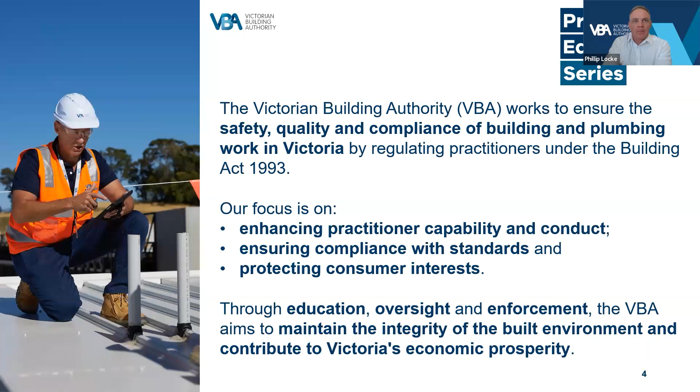As Victoria's building and plumbing regulator, the VBA is committed to ensuring a confident and thriving industry and collaborates with stakeholders to enhance practitioner capabilities and deliver improved outcomes for the community.

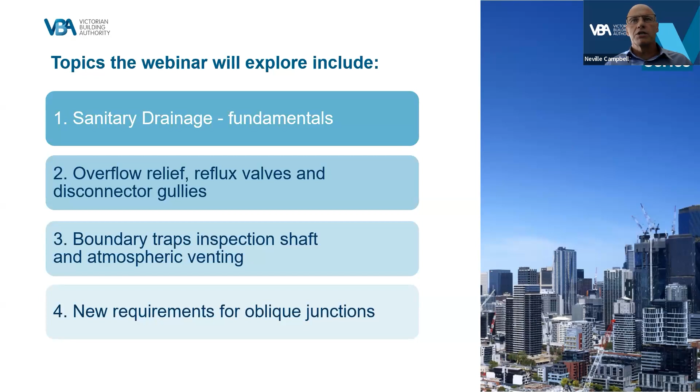The webinar will explore sanitary drainage fundamentals such as overflow relief, reflux valves, and disconnector gullies, boundary traps, inspection shafts, and atmospheric venting, and the new requirements for oblique junctions in below-ground drains. The learning goal for this webinar is to reinforce the fundamentals of drainage design for various classes of buildings.

Sanitary drainage fundamentals. So what is drainage work? Drainage work is the construction, installation, replacement, repair, alteration, maintenance, relining, testing or commissioning of any part of a below-ground sanitary drainage system.

This extends from the above-ground sewage or waste pipes up to the approved point of connection. This could be a network utility operator sewer, a land application system, or a holding tank. It also encompasses below-ground stormwater drainage, but we will not cover that in this webinar.

What is not drainage work? The opening and closing of inspection openings, caps, and covers in sewage and waste pipes, the clearing of blockages, or closed-circuit television inspection of sewage waste pipes using existing openings and removable grates, and design work carried out by a building practitioner, an architect, a draftsperson, an engineer, a landscape architect, or a designer.

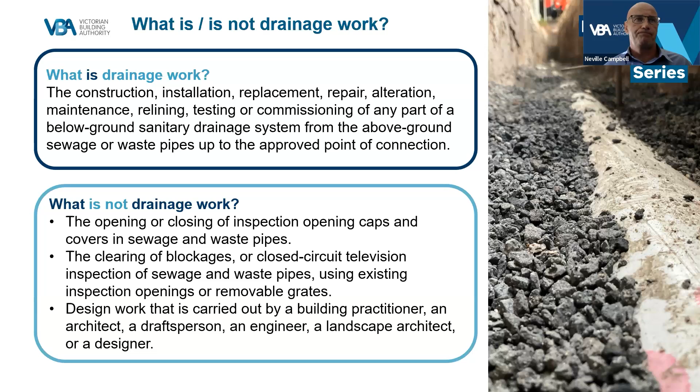A sanitary drainage system must ensure that sewage is transferred from a sanitary plumbing system to a disposal system, which is approved by the authority having jurisdiction. These will typically include a network utility operator sewer, a land application system, or a holding tank.

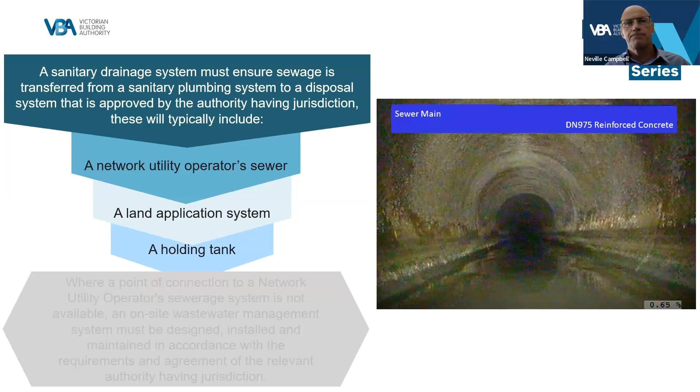Where a point of connection to a network utility operator's sewage system is not available, an on-site wastewater management system must be designed, installed, and maintained in accordance with the requirements and agreement of the relevant authority having jurisdiction.

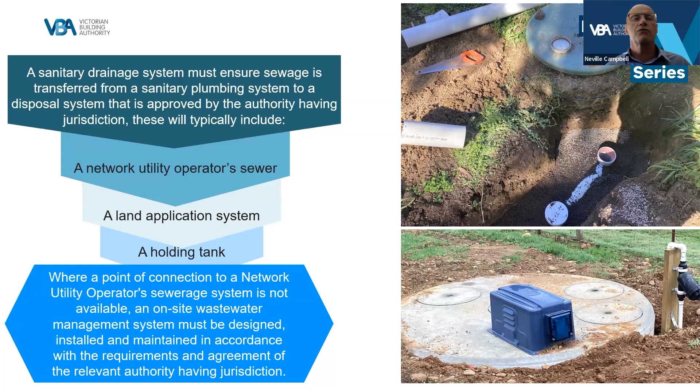Now we'll look at some of the fundamental components of a sanitary drainage system in some common scenarios. The first one is a typical Class 1 dwelling, your average home, or it might be a townhouse with its own sewer connection point. In this scenario, each drain must have a vent located at both ends of the drain if the drain incorporates a boundary trap.

At the upstream end of the drain, if the drain is in a boundary trap omitted area, and at the upstream end of any branch drain that exceeds 10 metres from the vented drain to the weir of the trap, you must have an overflow relief gully. A reflux valve may be used in lieu of an overflow relief gully where the site's entirely built on, and where there are no acceptable alternatives, or the ORG may be omitted where the lowest fixture connected to the drain is at least 3 metres above the ground at the point of connection.

Our second example is a site with 2 Class 1 residential buildings. In this scenario, the drain must have a vent located at the upstream end of each building, at the downstream end of the drain if the drain incorporates a boundary trap, at the upstream end of any branch drain that exceeds 10 metres from the vented drain to the weir of the trap, and at least 1 overflow relief gully.

A reflux valve may be used in lieu of an ORG where the site is entirely built on and there are no acceptable alternative locations, or the ORG may be omitted where the lowest fixture connected to the drain is at least 3 metres above the ground at the point of connection.

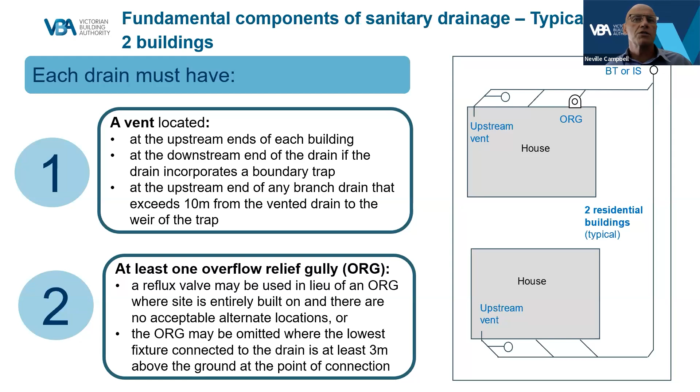Our third example is a site with 3 or more residential buildings, such as 3 villa units. While our example has 3 buildings, it could easily be more than 3. And if the 3 Class 1 dwellings were under the same roof line, they would still be considered 3 individual buildings.

In this scenario, each drain must have a vent located at the upstream ends of each building, at the downstream end of the drain if the drain incorporates a boundary trap, and at the upstream end of any branch drain that exceeds 10 metres from the vented drain to the weir of the trap.

You must have at least 1 overflow relief gully at each building. A reflux valve may be used in lieu of an ORG where the site's entirely built on and there are no acceptable alternative locations, or the ORG may be omitted where the lowest fixture connected to the drain is at least 3 metres above the ground at the point of connection, and an inspection shaft at or near surface level at each building.

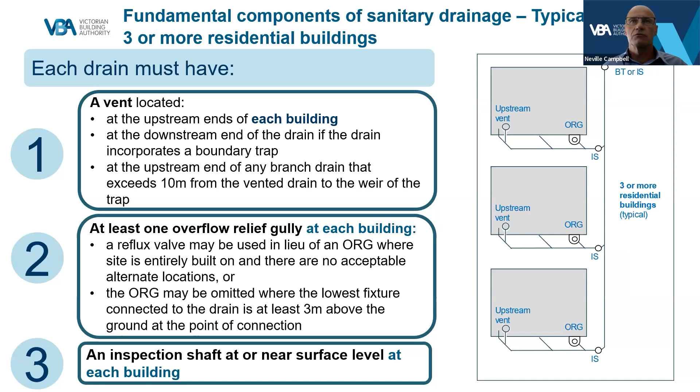This example is a typical arrangement of Class 8 commercial industrial buildings, such as factory units. In this scenario, each drain must have a vent located at the upstream end of the drain, at the downstream end of the drain if the drain incorporates a boundary trap, at the upstream end of any branch drain that exceeds 10 metres from the vented drain to the weir of the trap, and at least one overflow relief gully.

A reflux valve may be used in lieu of an ORG where the site's entirely built on and there are no acceptable alternative locations. Or the ORG may be omitted where the lowest fixture connected to the drain is at least 3 metres above the ground at the point of connection.

An inspection opening is required at each building. Although it is not mandatory, it is recommended that the IO is raised to ground. Note that in this scenario, the drain doesn't require a vent at each factory unit, provided there are not more than 2 water closet pans connected and that the branches do not exceed 10 metres in length.

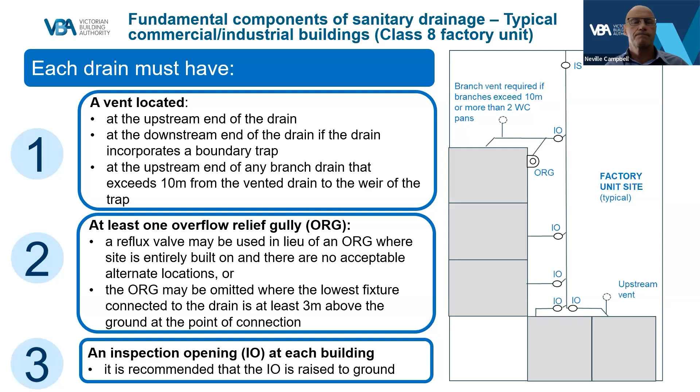The last example is a Class 2 building. This is a typical apartment building with one sole occupancy unit located above another. In this scenario, each drain must have provision for ventilation at the upstream ends of each building, at the downstream end of the drain if it incorporates a boundary trap, at the upstream end of any branch drain that exceeds 10 metres from the vented drain to the weir of the trap, and at least one overflow relief gully.

The reflux valve may be used in lieu of an ORG where the site's entirely built on, and there are no acceptable alternative locations. Or the ORG may be omitted where the lowest fixture connected to the drain is at least 3 metres above the ground at the point of connection.

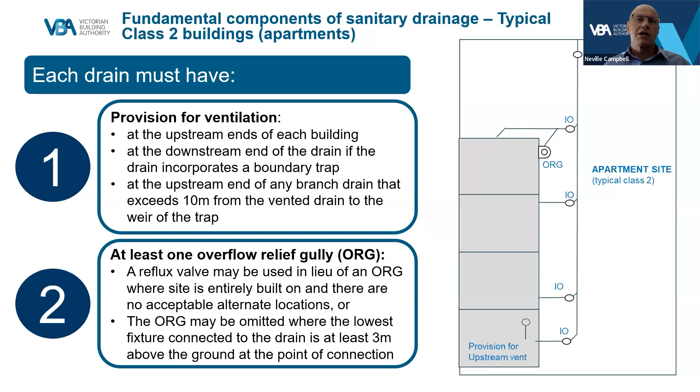In this type of building, if the ground floor is a car park and the lowest fixtures were on the first floor, the ORG could be omitted.

Quiz time. How many overflow relief gullies are required in a multi-unit development of 3 or more residential buildings? Is it 1 per building, 1 for the whole site, or none?

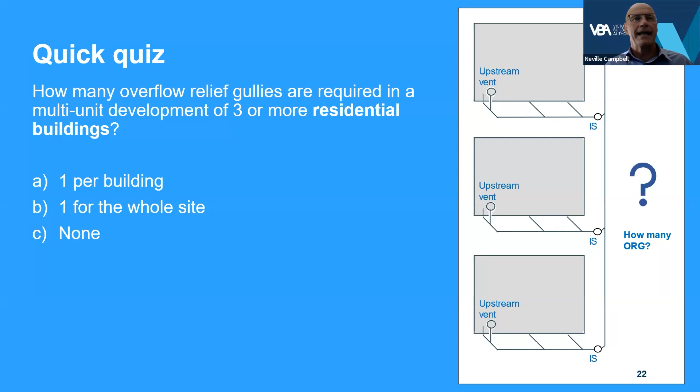The correct answer is A, 1 per building. Remember, this could be 3 Class 1 dwellings under the same roof line.

Now we'll look at drain locations and typical sizing parameters. This is typical of some of the common questions we get here in Tech and Reg.

So, location of drains. If a drain is located under or inside a building, it should only serve fixtures within that building. Where this is not practicable, the Plumbing Regulations of 2018 make provision for a drain that serves other buildings to be laid under another building, provided the following conditions are met.

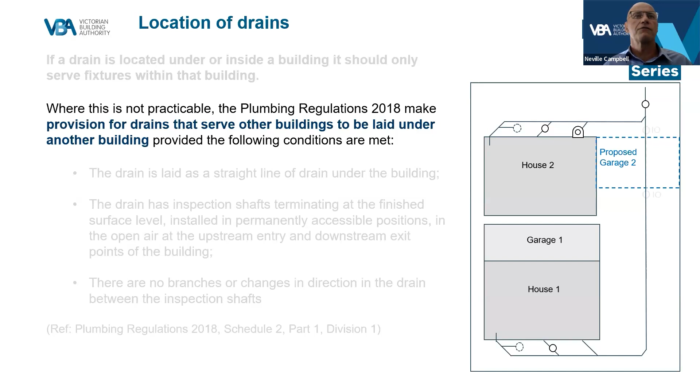The drain is laid as a straight line under the building. The drain has inspection shafts terminating at finished surface level, installed in permanently accessible positions in the open air at the upstream entry and downstream exit points of the building. And there are no branches or changes of direction in the drain between the inspection shafts.

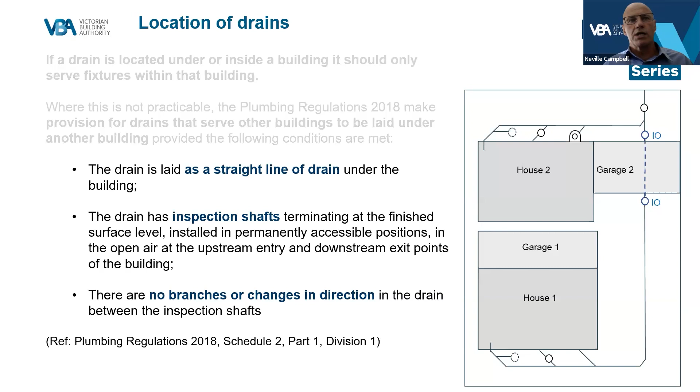Quiz time. In the figure below, does the drain under Garage 2 comply with the Plumbing Regulations of 2018? Is it yes, no, or not sure?

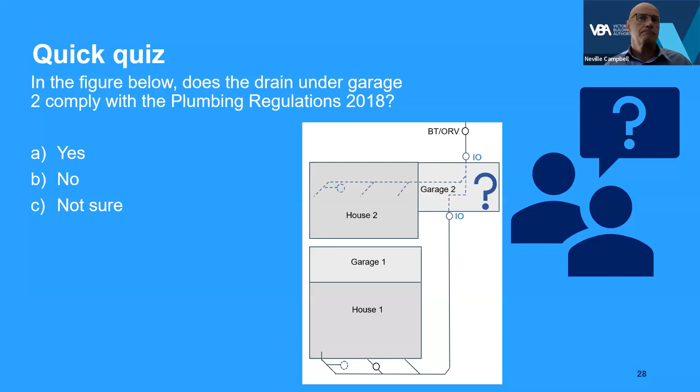The correct answer is no, because connections and offsets are not permitted under the building.

Sizing of drains. The minimum size of a main drain must not be less than DN 100. The minimum size of a branch drain must not be less than DN 65. DN 100 drains laid at 1 in 60 should not exceed 165 fixture units. Drains should be sized by the number of fixture units and the type of fixtures discharging into it.

Drains should not be upsized for the purpose of reducing grade. Discharge pipes of DN 50 or smaller must not be installed below ground unless they are connected to a floor waste gully or a vertical riser from a graded drain. This is a Victorian requirement under the Plumbing Code of Australia.

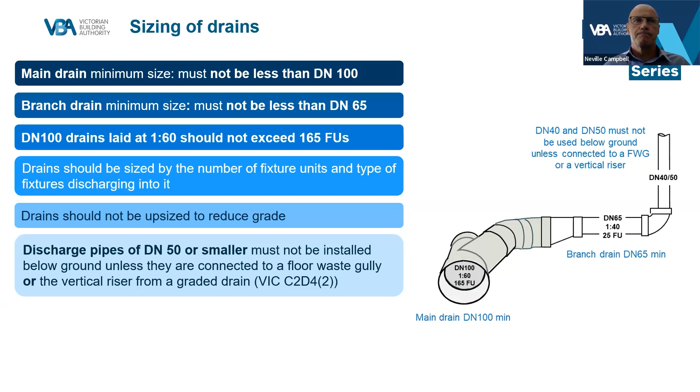Sanitary drainage systems must avoid damage from superimposed loads, such as loads from buildings and vehicular traffic. To achieve this, the standard requires drains to be laid with the appropriate depth of cover.

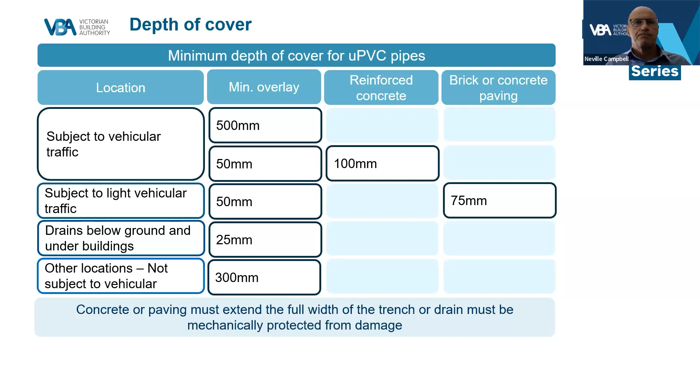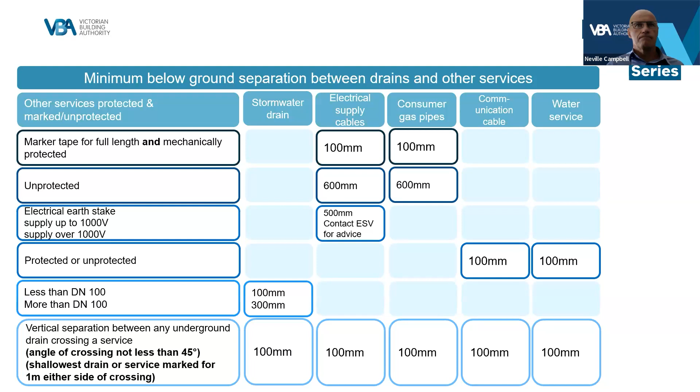Reuse of drains where buildings are demolished or removed. Where a building is demolished and replaced, existing drains must also be replaced to the point of connection. However, drains may be reused if

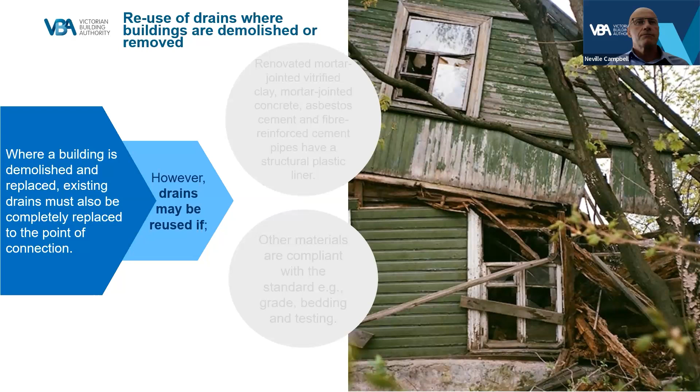mortar-jointed vitrified clay, mortar-jointed concrete, asbestos cement and fibre-reinforced cement have been renovated using structural plastic liners, or drains constructed of other materials have demonstrated compliance with the relevant sections of the standard, for example, grade, bedding and testing. Further guidance can be obtained from Practice Note DR03, Property Sewer Drains.

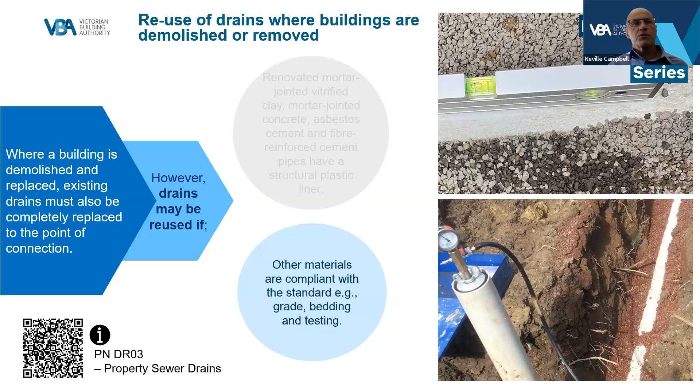Building over drains. When making alterations or additions to buildings, the footing system should not be placed over or adjacent to existing drains unless appropriate clearances have been achieved. Clearances include the angle of intersection with the footing, the annular space for wall and footing penetrations, installation of flexible joints if required, and the angle of repose from existing footings.

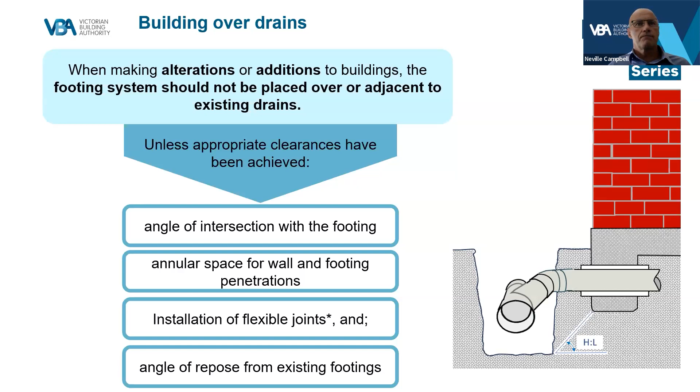Inspection shafts and boundary traps should not be built over. Where this cannot be avoided, the inspection shaft and boundary trap may be located under a roofed area or in a recess, subject to the relevant requirements of the standard.

Now we'll look at inspection shafts and boundary traps in a little bit more detail. Inspection shafts and boundary traps, general requirements. Each main drain must be provided with a boundary trap in a boundary trap area or an inspection shaft in a boundary trap omitted area.

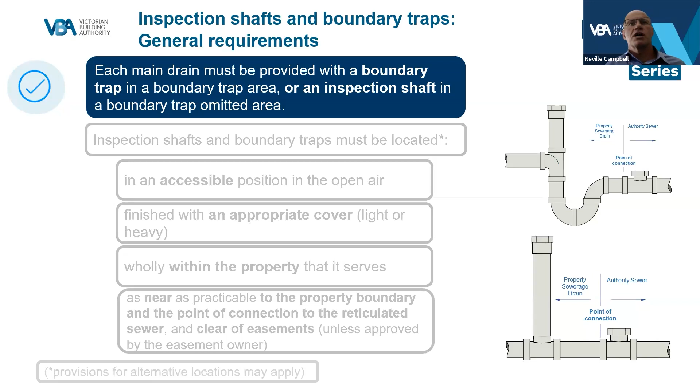Inspection shafts and boundary traps must be located in an accessible position in the open air, finished with an appropriate cover, that would be a light or heavy cover depending on the situation, wholly within the property that it serves, and as near as practicable to the property boundary and the point of connection to the reticulated sewer, and clear of easements unless approved by the owner of the easement.

Provisions for alternative locations may also apply. Where the inspection shaft or boundary trap cannot be sited in an accessible position in the open air, an alternative position may be used as follows.

The riser may be installed under cover, such as under a roofed area, provided the cap is finished at surface level and is readily accessible with not less than 1 metre clear space above the cap, and the cap is airtight.

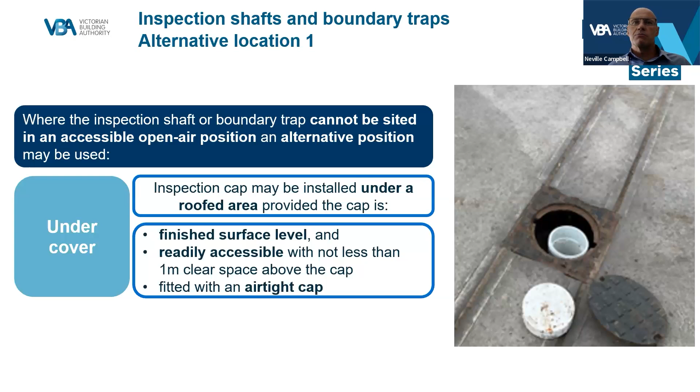Alternative location 2. The inspection cap may be recessed into an external wall of a building if the building is constructed up to the boundary and it is impracticable to site the inspection cap in the open air or under cover. The inspection cap is airtight with 100 millimetres clear space around the cap. There must also be 1 metre of clear space above the cap, and the recess must have a removable panel.

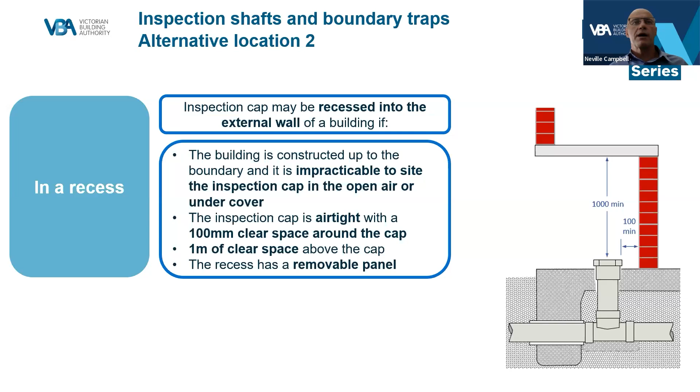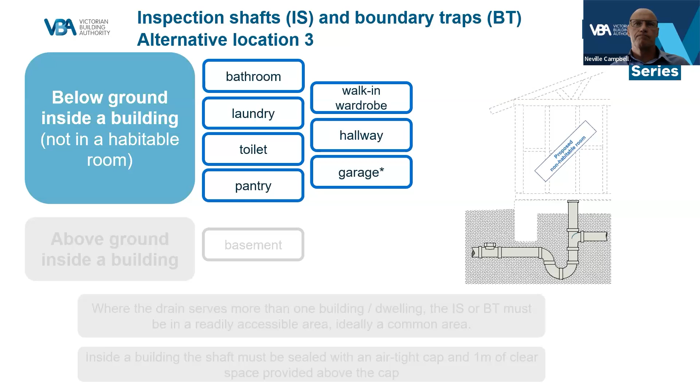A boundary trap could also be installed above ground inside a building, for example, in a basement. Where the drain serves more than one building or dwelling, the IS or BT must be in a readily accessible area. Ideally, this would be a common area. The location chosen should not prevent access to the BT or IS, even if the neighbours were on an extended holiday or the house had been sold to someone else.

When installed inside a building, the shaft must be sealed with an airtight cap and 1 metre of clear space provided above the cap.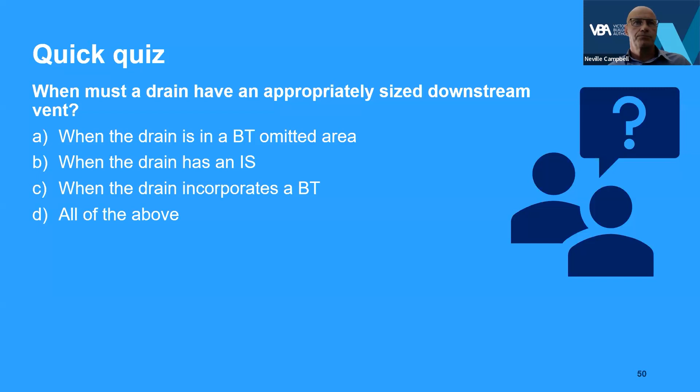Correct answer is when the drain incorporates a BT.

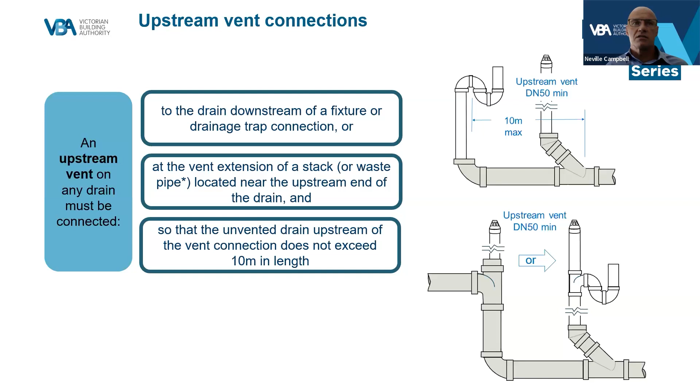Upstream vent connections. An upstream vent on any drain must be connected to the drain downstream of a fixture or drainage trap connection, or at the vent extension of a stack or waste pipe located near the upstream end of the drain, so that the unvented drain upstream of the vent connection does not exceed 10 metres in length.

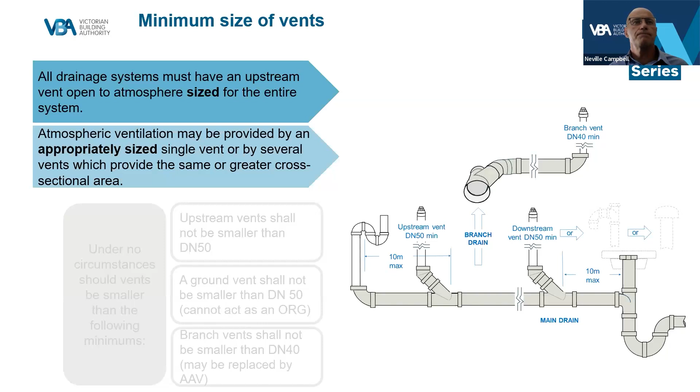Under no circumstances should vents be smaller than the following minimums. Upstream vents should not be smaller than DN50. A ground vent shall not be smaller than DN50, but be aware that 50mm ground vents cannot act as an ORG. Branch vents should not be smaller than DN40, but they may be replaced by an AAV.

In this figure, there are no fixtures depicted. We're only showing ventilation requirements here.

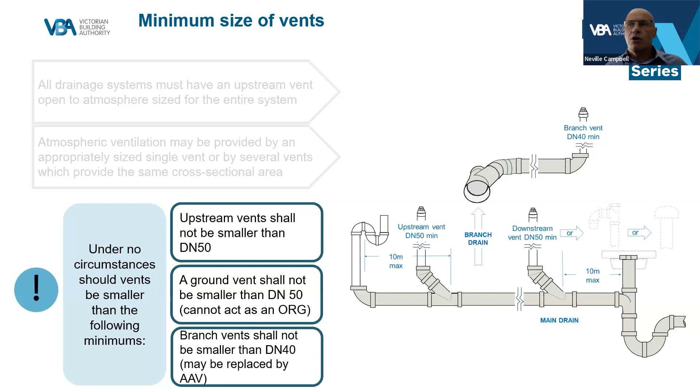Air admittance valves, or AAVs. AAVs may be used to ventilate a branch drain, provided the system has at least one upstream vent on the main drain which is open to atmosphere. AAVs must not be used for upstream venting of a main drain, venting of a boundary trap, or to vent an interceptor appliance. Now let's see who was listening to what I just said.

Correct answer is C, no it can't.

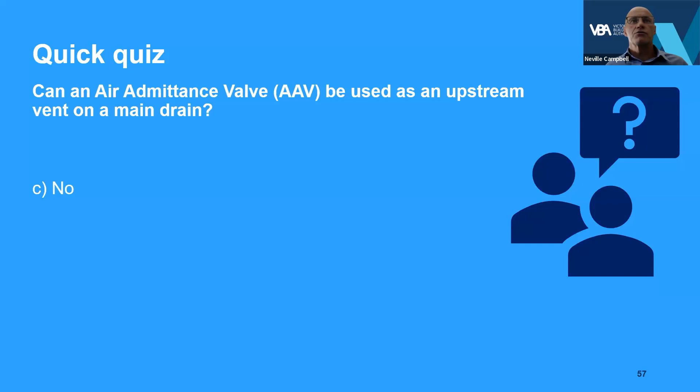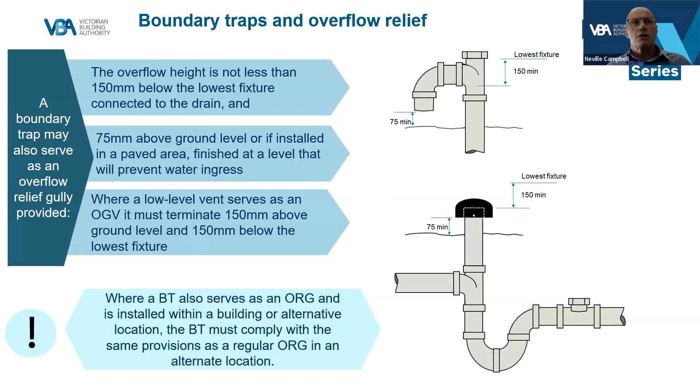Where a BT also serves as an ORG and is installed within a building or alternative location, the BT must comply with the same provisions as a regular ORG in an alternate location. We'll look at this in greater detail in a later slide.

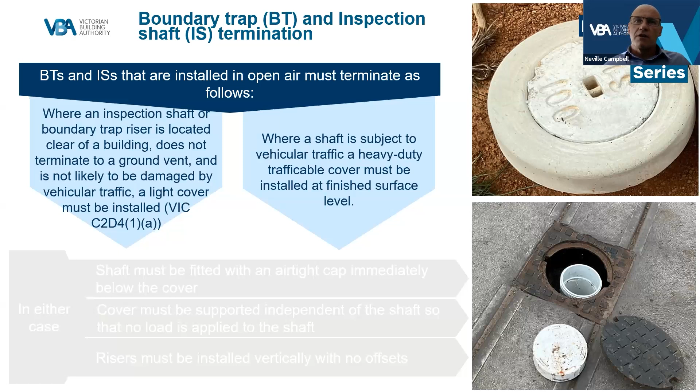This is a Victorian requirement under the Plumbing Code of Australia. Where a shaft is subject to vehicular traffic, a heavy-duty trafficable cover must be installed at finished surface level.

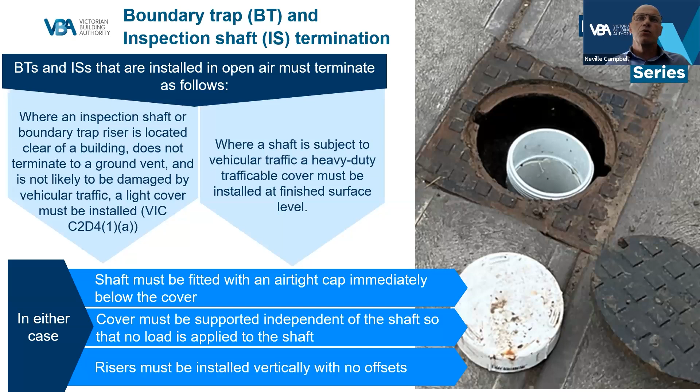In either case, the shaft must be fitted with an airtight cap immediately below the cover. The cover must be supported independent of the shaft so that no load is applied to the shaft, and risers must be installed vertically with no offsets.

Now we'll take a look at gullies. Essentially, either configuration in this picture could be a disconnector gully or an overflow relief gully, depending on its intended purpose. The disconnector gully is installed internal or external to a building to provide disconnection between the waste discharges and the sanitary drainage system. An overflow relief gully is installed internal or external to the building as provision for relief from sewer surcharge from the reticulated sewer.

Note that gullies must have risers installed vertically with no offsets. Again, this is a Victorian requirement under the Plumbing Code of Australia. A floor waste gully is considered a fixture trap and must be installed inside a building and finished at surface level with an accessible, removable grate.

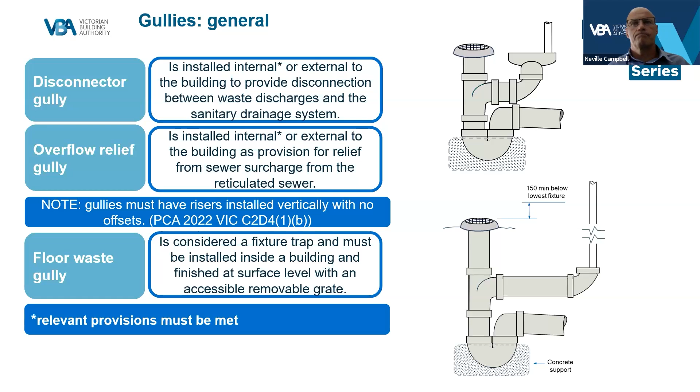ORG locations. The ORG must be located within the property served, external to the building, where the discharge is noticeable, with more than 2 metres clear space above the grate. Note that risers from gullies must extend vertically from the water seal without being offset.

Height of the overflow. At least one overflow relief gully must be installed in each drain. Additional gullies are recommended where lower buildings may be affected by surcharge from higher buildings. It may be omitted if other relevant provisions have been met.

The ORG overflow height must be minimum 150 millimetres below the lowest fixture connecting to the drain.

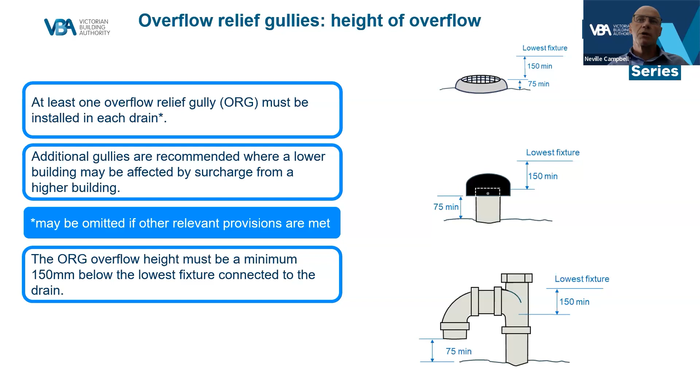In a typical Class 1 dwelling, the separation height is measured between the spill level of the ORG and the following. For a water closet pan, it's the top of the water seal. For a floor waste gully or shower, it's the surface level of the grate. And for other fixtures, surface level of the outlet.

The spill level of the ORG must be 75 millimetres above ground level, or if installed in a paved area, finished at a level that will prevent water ingress.

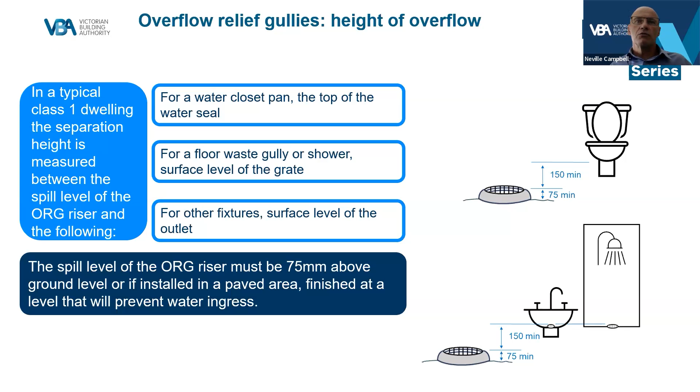ORG alternate location 1. Where it's not possible to locate the ORG outside the building, the standard provides for the ORG to be located inside the building, provided the gully riser is raised to floor level and sealed with a removable airtight cover. The riser has an equally sized overflow pipe connected above the water seal.

The overflow pipe discharges to the open air at an outside wall. The overflow pipe must be graded at not less than 1 in 80 towards the riser, and no fixture connections are permitted to the overflow pipe.

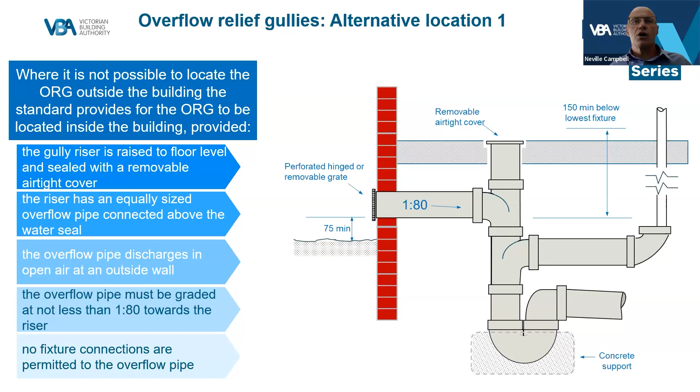The second option is to locate the ORG in a recess on the outside of the building, provided the recess is not smaller than 300 millimetres wide and 600 millimetres high. The base of the recess is graded away from the building. The riser is not more than 300 millimetres from the face of the building and is fully accessible.

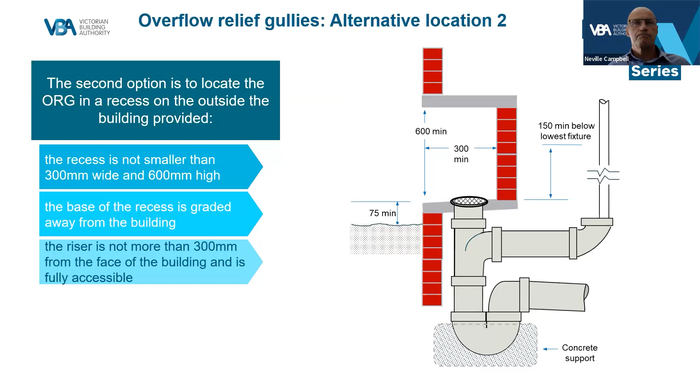Omission of an overflow relief gully. An overflow relief gully may be omitted in the following situations: where the site is entirely built on and it is not possible to locate the gully in an acceptable location, and the ground floor fixtures discharge through a reflux valve. The lowest fixture connected to the drain is at least 3 metres above the ground at the point of connection, or the drain serves toilets or amenities in a park or reserve, the floor of which is graded towards an external door.

So one place you might see the 3 metre rule applied is in a Class 2 building with no fixtures on the ground floor, or it could be a house on stilts or a steep block.

When must reflux valves be installed? When the spill level of the ORG is less than 150 millimetres below the lowest fixture. So if you can't achieve this overflow height, it must be installed.

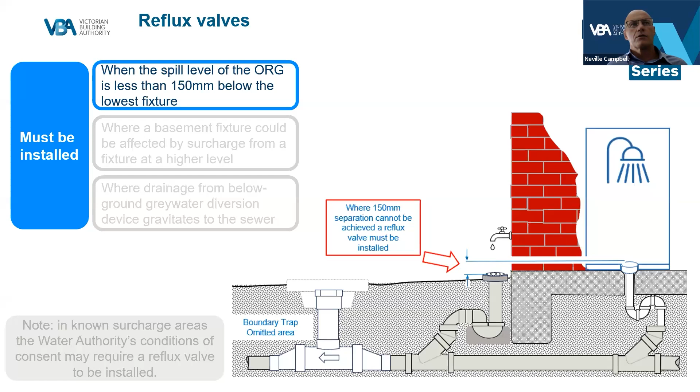Where a basement fixture could be affected by surcharge from a fixture at a higher level. An example of lower fixtures might be a laundry in a basement being protected on that specific branch of the drain. A reflux valve must also be installed where drainage from below ground grey water diversion devices gravitates to the sewer.

Note that in known surcharge areas, the Water Authority's conditions of consent may require a reflux valve to be installed.

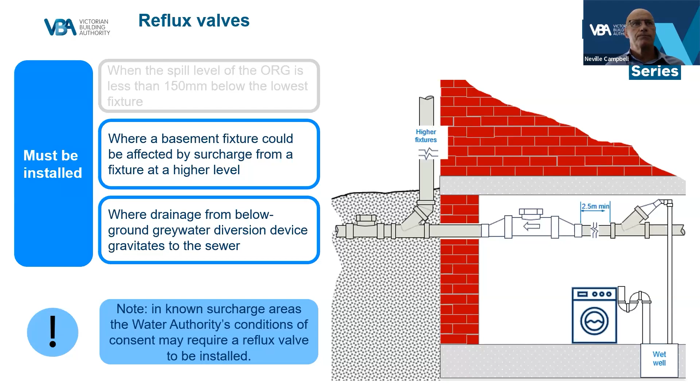Quiz time. When must a reflux valve be installed? Is it when the spill level of the ORG is less than 150 millimetres below the lowest fixture? Is it where the basement fixture could be affected by surcharge from a fixture at a higher level? Is it where drainage from below ground grey water diversion devices gravitates to the sewer? Is it in known surcharge areas? Or is it all of the above?

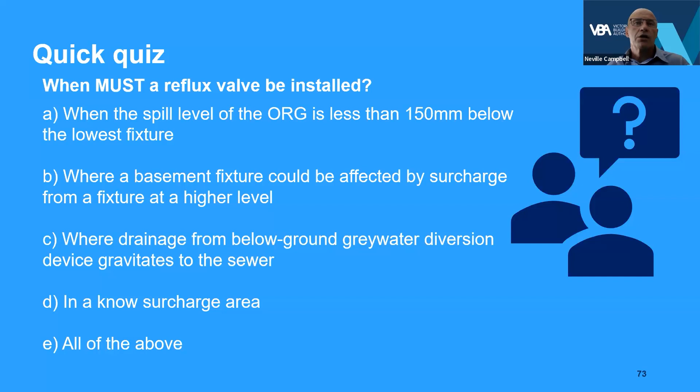The correct answer, of course, is all of the above.

Where must a reflux valve be installed? Where a reflux valve is installed as protection against sewer surcharge, it must be located immediately downstream of a boundary trap or adjacent to an inspection shaft in a boundary trap omitted area.

Reflux valves must be maintainable from their installed position. This could be installed above ground, installed in a reflux chamber, or able to be maintained from finished surface level.

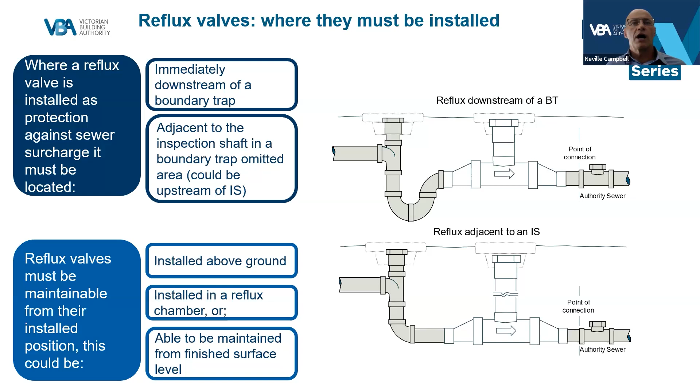Inspection opening requirements. Outside of a building, inspection openings must be positioned within 2.5 metres of the building on each branch connecting a water closet, at intervals of not more than 30 metres, at the point of connection, at or immediately upstream of a jump-up lead-off connection, or where a new section of drain connects to an existing drain.

At least one inspection opening must be raised to or just below ground level on each main drain. This could be an inspection chamber, an inspection shaft, a jump-up riser, a boundary trap riser, or a reflux valve riser. It is not recommended that a reflux valve riser is used for maintenance, as this can damage the valve seat.

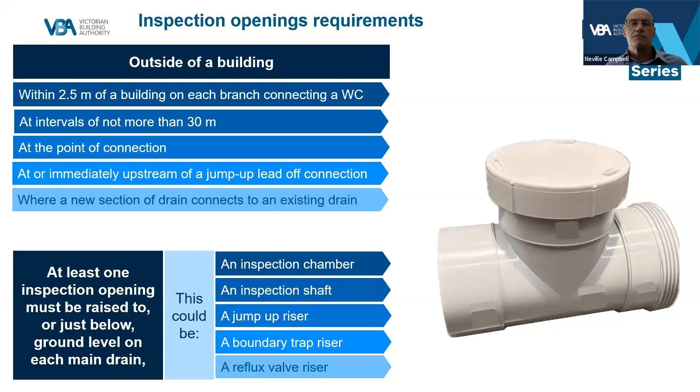Junctions in drains. Junctions installed in the vertical plane can be used to connect drains at different elevations, a single discharge pipe, or a jump up. The following restrictions apply to junctions installed in the vertical plane.

The riser must not exceed 2 metres from the graded drain invert. Junctions in the vertical plane must not be used to connect a stack below ground. The junction must be supported on concrete if the riser extends 1 metre or more or is raised to ground.

The 2 metre rule applies from invert to invert, but does not apply to the riser extension between the lead-off and ground level. So this jump-up requirement, if I can get my laser pointer to work, applies from invert to invert. If this were extended to ground level, that doesn't come into the 2 metres.

Construction of a jump-up. A jump-up can be constructed with a bend or a junction at the base. Sweep, square, and 45 degree junctions can be used to connect into the riser shaft.

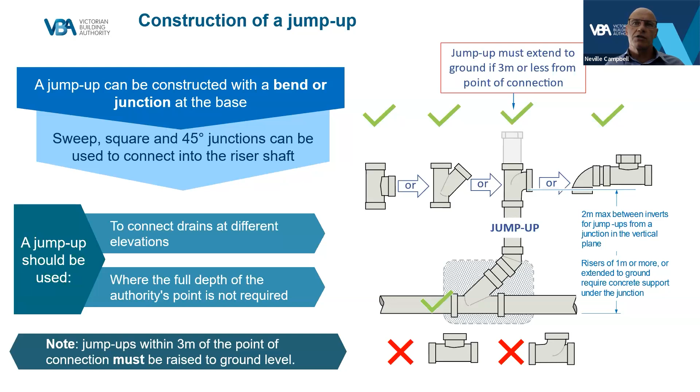A jump-up should be used to connect drains at different elevations or where the full depth of the authority's point is not required. Note that jump-ups within 3 metres of the point of connection must be raised to ground level.

Jump-ups with an inspection shaft extended to ground are known as an inspection shaft jump-up, or ISJU. Inspection shafts, or ISs, are constructed with a square junction at the base, and no connections are permitted in the IS riser shaft.

Note the difference here between the jump-ups and the inspection shaft. It's all about this connection here. This is a square junction, so there can be no connections in this riser.

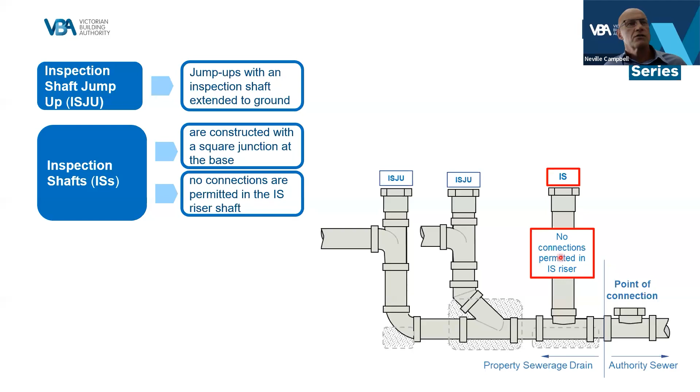Connection of a stack to a below-ground drain. Stacks connecting to below-ground drains must connect by 2 45-degree bends separated by a straight length of pipe, which is not shorter than twice the diameter of the pipe, or an 88-degree bend if the stack extends through not more than 2 floors.

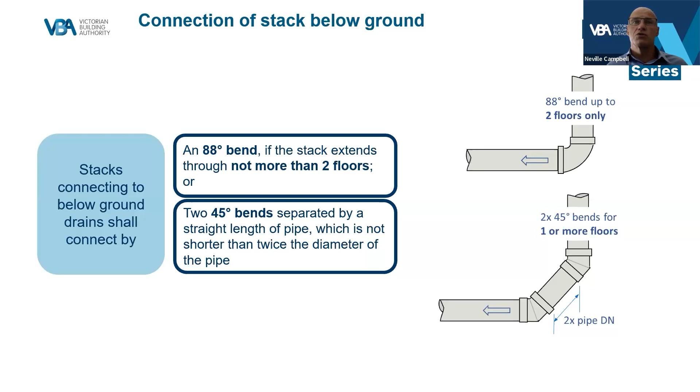Where the stack connects through a junction, the junction must be a 45-degree junction on grade and an 88-degree bend if the stack extends through not more than 2 floors, or 2 45-degree bends separated by a straight length of pipe, which is not shorter than twice the diameter of the pipe.

So, for example, if you're using 100mm DWV, the straight section of pipe between the 2 45 bends, which is this bit here, should not be less than 200mm in length, so as to form a long radius bend.

Note that where the stack and the main drain are unequal sizes, the change in size must be made above ground using a taper fitting.

So if your main drain was 150mm and your stack was 100mm, this would have to be an equal junction, 150mm on all sockets, 150mm bend, and then the change in size made above ground using a taper fitting.

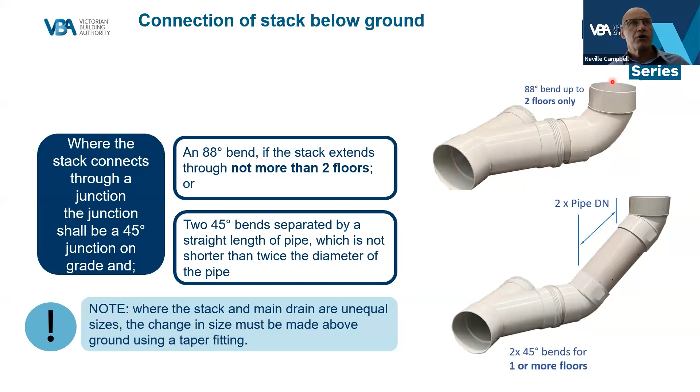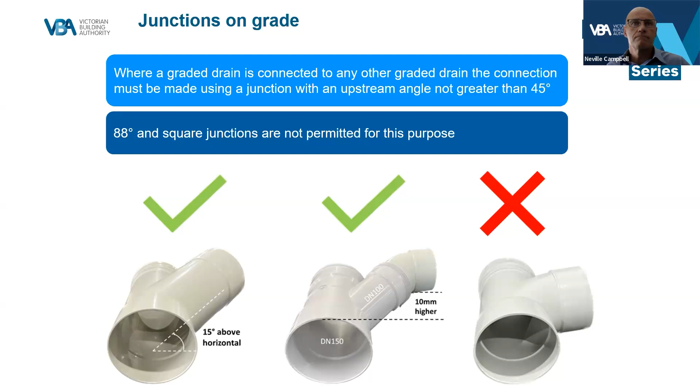New requirements for junctions in drains. On the 26th of September 2023, changes to the Plumbing Regulations 2018 adopted the 2021 version of the Australian New Zealand Standard 3500 series as part of the deemed-to-satisfy requirements for compliance with the Plumbing Code of Australia. For below ground drains, the most significant change is where a 100mm junction connects a 100mm branch pipe to another 100mm pipe, the entry level of the branch pipe must be rotated to 15 degrees above the horizontal. This requirement applies to all drains in all classes of buildings. Note that the drain can revert to grade upstream of the junction. The new requirement is intended to reduce stranding of solids in conjunction with the increase in water efficiency.

Unequal junctions. Where an unequal junction is used to connect a branch drain to another drain, the invert of the branch drain must be at least 10mm higher than the soffit of the drain to which it connects. Unequal junctions must not be used to connect a stack. So as previously mentioned, where the stack riser has a smaller DN than the below ground drain, an equal junction must be used with the transition in size made above ground using a taper fitting.

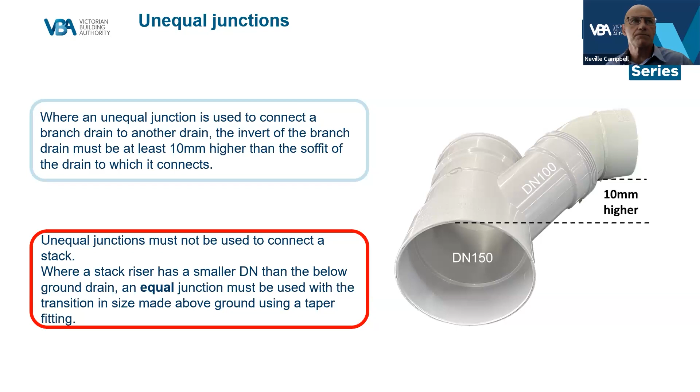Now let's see who's listening. A stack can be connected to a below ground drain by an unequal junction. True or false? True if the junction is rolled up to 15 degrees. True if the invert is 10mm higher than the soffit of the drain to which it connects. Or false, an unequal junction cannot connect a stack to a below ground drain.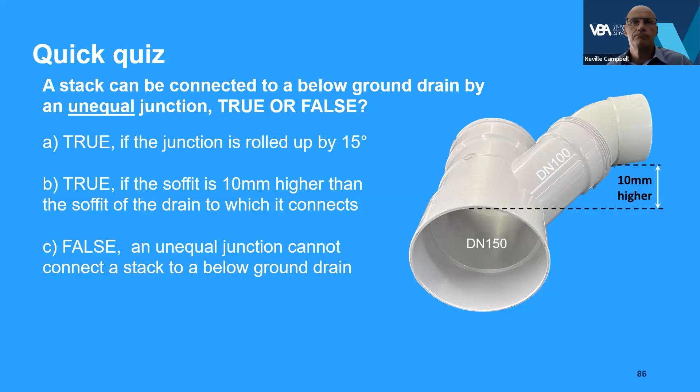The correct answer is C, false. An unequal junction cannot connect a stack to a below ground drain.

88-degree and square junctions in below ground drains. 88-degree junctions must only be used for the connection of a graded drain into a jump up or boundary trap riser, or as an inlet riser to a gully or a floor waste gully. Square junctions must only be used to connect an inspection shaft into a graded drain, as an inspection opening, as an inlet riser to a gully or floor waste gully, or at the connection of a graded drain into a jump up or boundary trap riser. Note that no connections are permitted in an IS shaft riser.

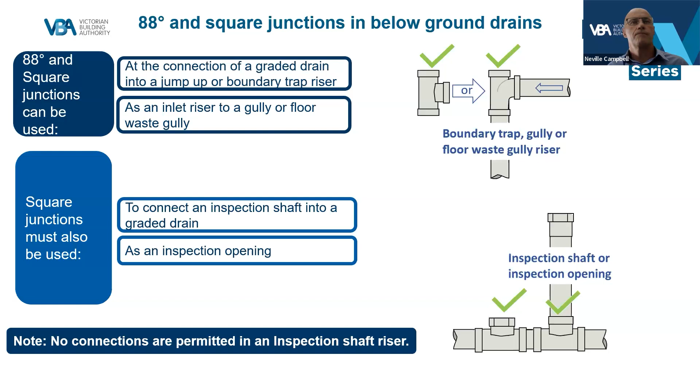Drains in other than stable ground. The sanitary drainage installation must avoid damage from superimposed loads and ground movement. This is a requirement of the Plumbing Code of Australia. Clause 5.6 of Australian New Zealand Standard 3500 Part 2 also requires the methods of support and bedding of a drain to be designed to suit the ground conditions. For information on ways of demonstrating compliance with these requirements, refer to Appendix A of the standard or our Practice Note DR04, which is available from the VBA website.

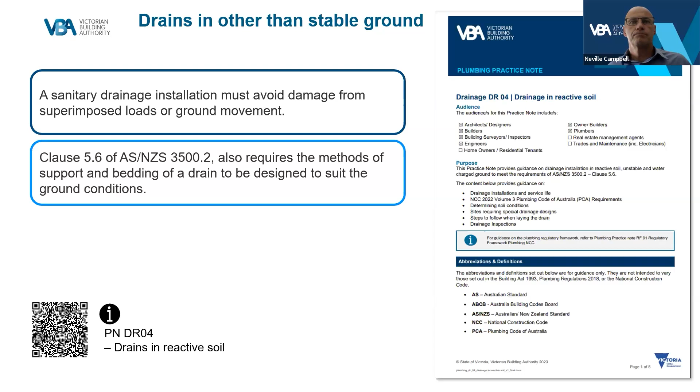Bedding of drains: trench base, side support and overlay. In stable soils, drains may be laid on the undisturbed base of the trench, provided the trench is free from rocks, tree roots and other sharp objects, or laid on an appropriate bedding material. For soils containing clay, rock, shale, gravel or hard objects, the drain must be laid on an appropriate bedding material.

Materials used for bedding or filling must be one of the following: crushed rock, gravel screenings, or similar recycled materials sized between 7 and 10mm. Quarter minus is acceptable provided it is consistent in size upon visual inspection. Free-running sand excavated from the trench, capable of passing through a 2mm sieve, which does not contain clay, organic or other deleterious materials, is also acceptable. This is a VIC requirement under the Plumbing Code of Australia. So just to reiterate, it must be excavated from the trench, it can't be brought in. Cement mortar bedding is also acceptable. For more information on bedding of drains, refer to Practice Note DR02, Bedding Materials for Below Ground Sanitary Drains.

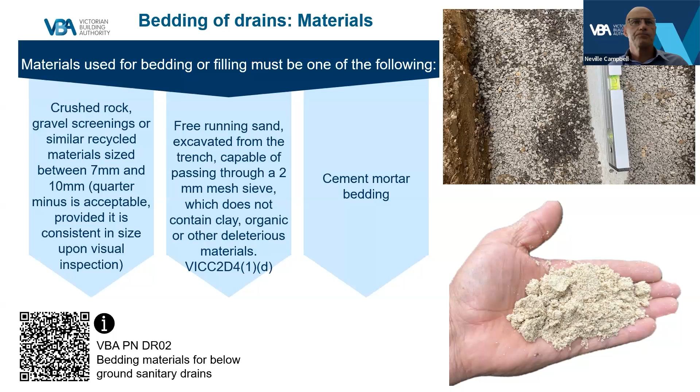All new, reused, repaired or replaced sanitary drainage installations must be tested to ensure that they're watertight. Drains may be tested using any of the following methods: an air test, a vacuum test, or a water test using non-drinking water provided by the network utility operator. That means there must be a network utility operator's recycled water on site if you're going down the avenue of a water test, and that is a Victorian requirement under the Plumbing Code of Australia.

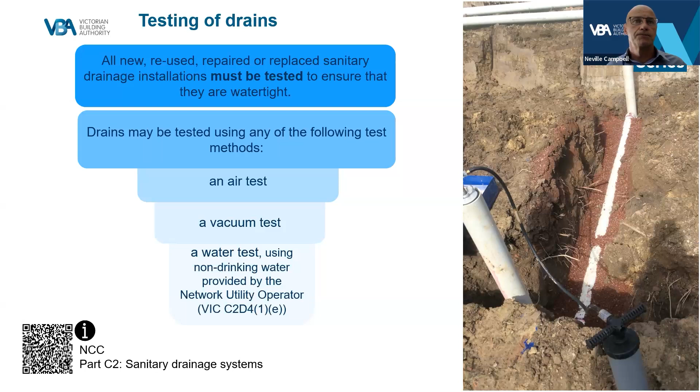Concrete support of drains must be installed at all vertical riser bends greater than DN65. That's all vertical rises, not just mains, also on branches. That's a Victorian requirement under the Plumbing Code of Australia. It must be provided under the junction of any riser that extends to ground level.

It must be provided under the junction of any jump up if it exceeds 1 metre in height, under junctions in drains that form an IS up to the centre line of the fitting, and under junctions in drains that form a jump up continued up vertically to the underside of the bend that is fitted into the junction. Note that is considerably more concrete than the centre line of the fitting.

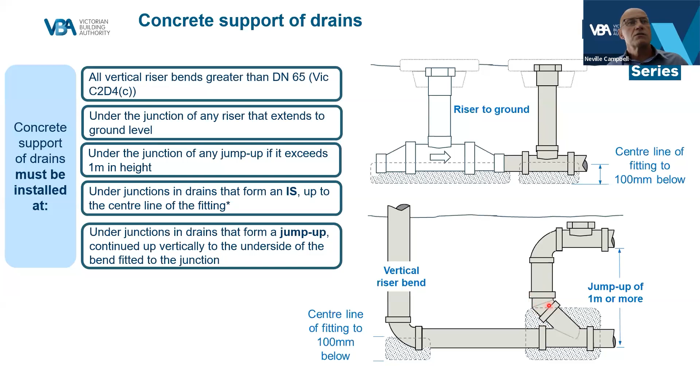Centre line of the fitting applies if it's an inspection shaft or a reflux shaft riser. But if it's a jump up to the base of the fitting, which goes into the junction - concrete support must be provided under the base of a boundary trap riser up to the inlet socket of the trap, and under the base of a gully trap up to the inlet socket of the trap. It shouldn't be closer than 20 millimetres to a flexible joint.

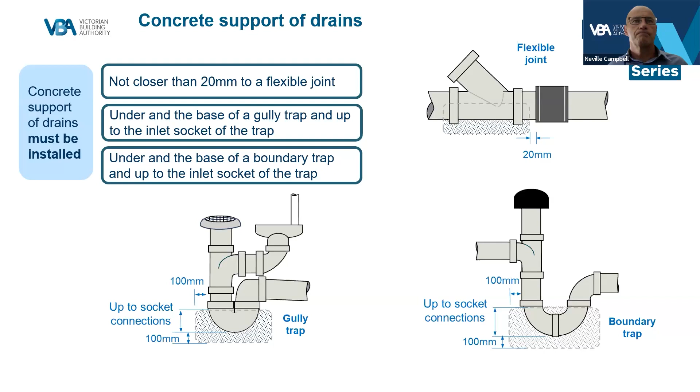Concrete anchor blocks must also be used to support drains between 1 in 5 and vertical. This applies to all drains up to DN150 and exceeding 3 metres in length. All concrete must have minimum characteristic compression strength of 20 MPa. Water used for mixing concrete must not be harmful to the mixture, to the reinforcing or anything embedded in the concrete. Note that some rapid set concretes do not achieve 20 MPa.

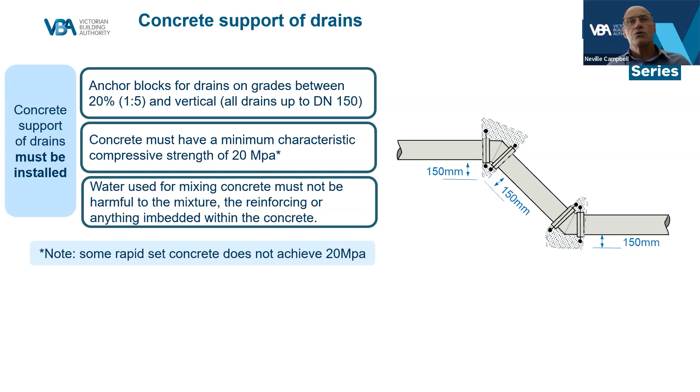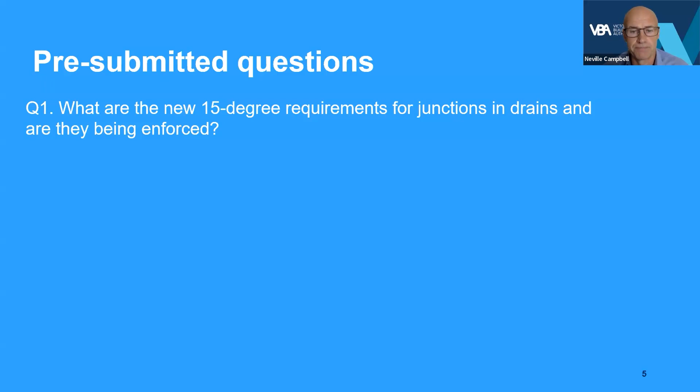Thanks, Dev. And another one here we had: where do I have to install swivel joints? I think this was a pretty common theme. The standard requires drains laid in filled, unstable or water charged ground to be designed to withstand the ground conditions. While there's no specific requirements for this, both Appendix G of Australia and New Zealand Standard 3500 Part 2, 2021, and our own practice note DR04, drains in reactive soil, provide guidance on what may be deemed acceptable. For Class P sites, engineering advice should be sought.

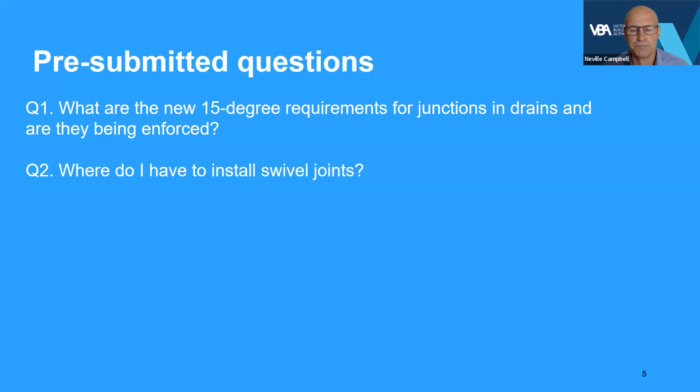Got one more here. What is the plumber's responsibility for work that does not fall under the building permit approval process? Another one we often get. A licensed plumber is responsible for all regulated plumbing work that they carry out or supervise. These requirements apply even when there is no building permit in place.

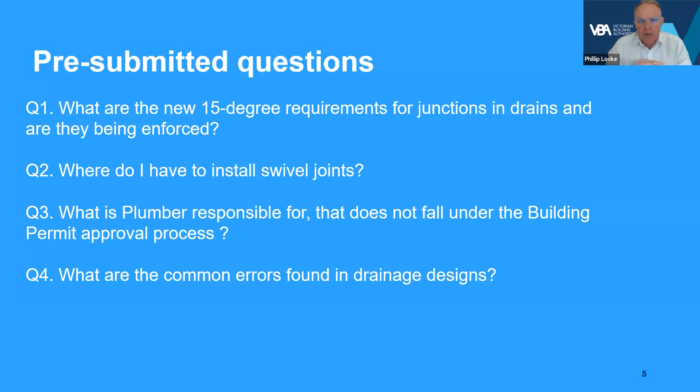Another one: what are the common errors found in drainage designs? This is quite a long list, but some of the most common issues are inconsistently sized bedding material, insufficient concrete support, insufficient grade, insufficient separation between services, incorrect testing procedures, and a lack of knowledge around the testing requirements.